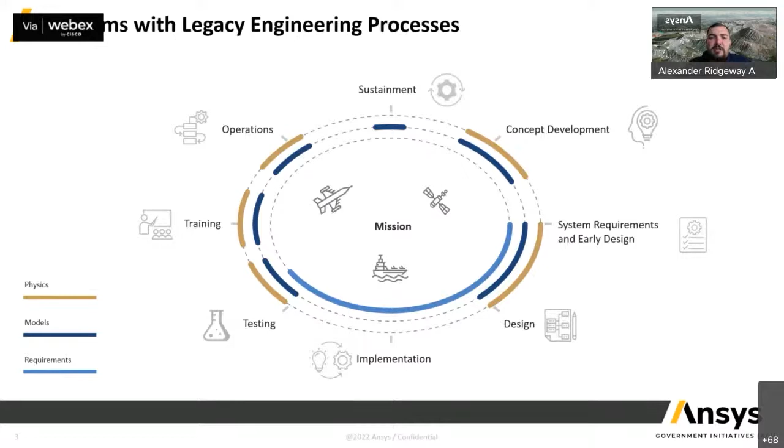There was so much time, so much effort lost in all of these gaps. And we know that in this process, we don't just go forward in time—we go back, from operations to a new concept, from testing back to design. Every time we're redesigning these tools, and it's not efficient.

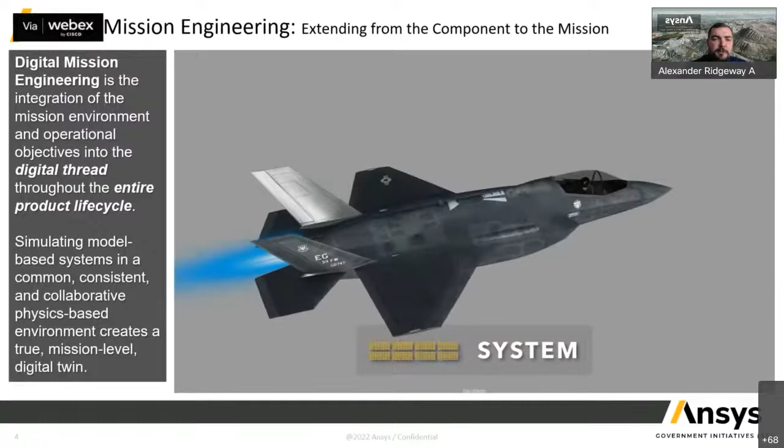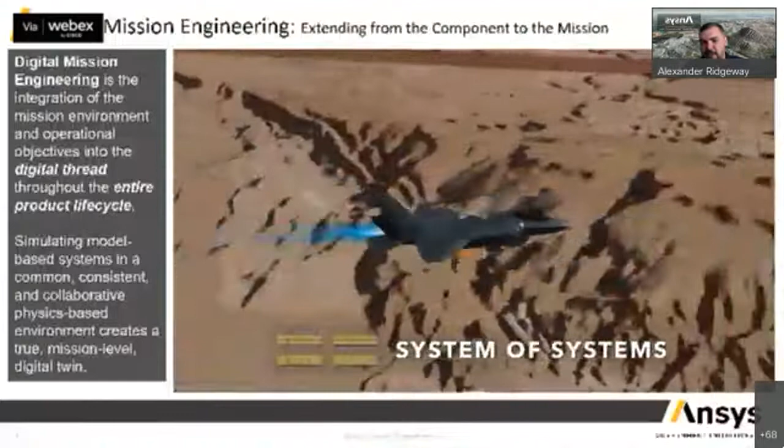So what we're talking about now is how to improve that efficiency using digital mission engineering. Digital mission engineering is the integration of the mission environment and the operational objectives into the digital thread throughout the entire product lifecycle. This video is showing the whole life cycle of an F-35, an aircraft in theater, in mission, performing. This mission is very defense oriented, and that's just the content and materials I have to explain digital mission engineering.

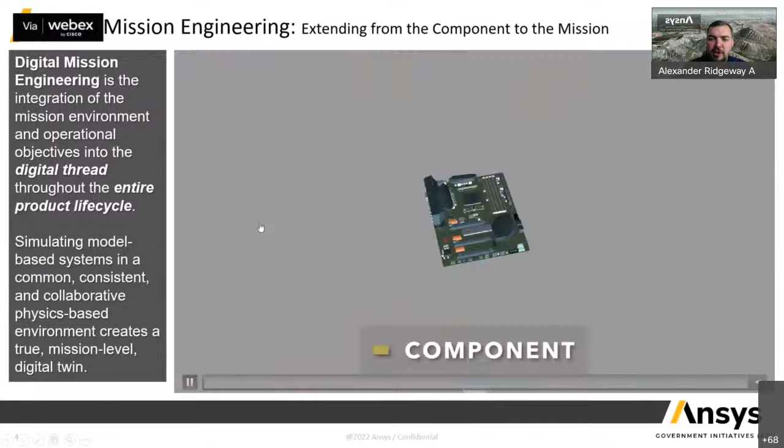But there are other missions you can use these tools for, especially cargo missions, passenger missions, UAV missions, urban air mobility missions. All of these missions are essentially similar, and they can all be modeled within our tools.

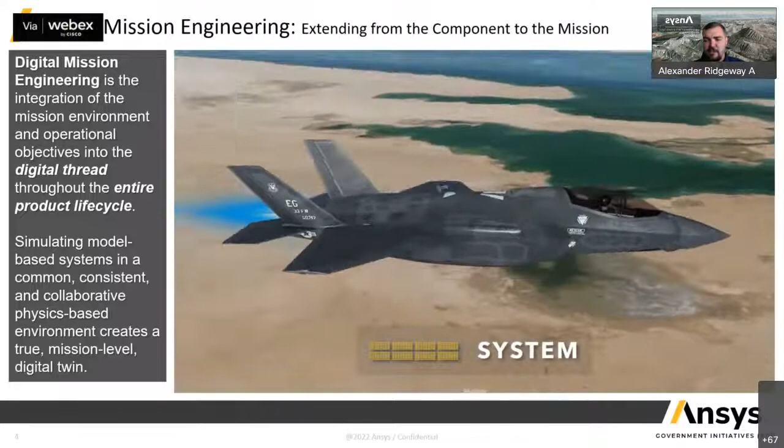So we take the component simulation, the subsystem simulations, the system simulations, and the system of systems simulations—maybe GPS, maybe a communication system on the ground, maybe a radar system at the airport—and we model all of those inside of the mission. It's very important. We do all of this so that we can create a digital twin, a digital representation of what's actually happening.

So here's that same example from before, the life cycle model, but now the life cycle model is throughout. We don't have the gaps in the design to implementation and the testing to the training. We maintain those models from the early conceptual development phase as we're building those systems, and we carry them throughout operations and sustainment.

The process, we cannot think of this as a linear approach. It continues to evolve and evolve. And there's also times where these life cycles spin off other life cycles, other development, other design, and we have to consider all of these things.

So overall, digital mission engineering requires that you put all of your components, your platforms, your systems of systems, all within a mission, all within a multi-domain physics environment to really improve your overall efficiency, optimize your performance, and just improve safety metrics due to things like traceability.

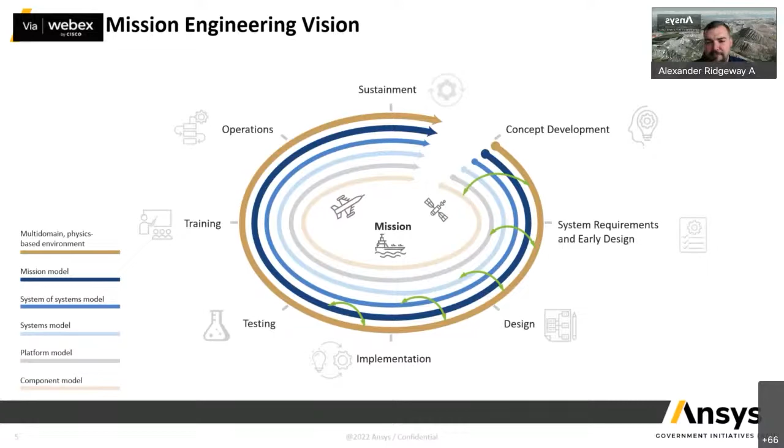And so now what I'm going to share with you is how to do it. These are kind of big ideas, but what are the direct steps in order for you to actually start the process of digitizing and performing digital mission engineering? Well, the first main step is structural analysis.

ANSYS provides tools like Mechanical, but there are other structural capabilities and structural analysis tools out there. Those are really important for the stress and strain, and really important for designing, building, and testing that system. That also has a very important part of the performance of the vehicle. The shape of the vehicle is directly related to the performance of the vehicle.

Are we going to do a lifting body aircraft in the future? How is that going to be developed, designed, and deployed? So mechanical, fluid, the structures and fluids, they all relate to each other, as well as external tools and external payloads like

electronics. Those could include radars, transmitters, and receivers, very important to understand not just can the vehicle fly, but in what condition. What condition, meaning communication conditions, pilot condition, weather condition, any different condition within the mission.

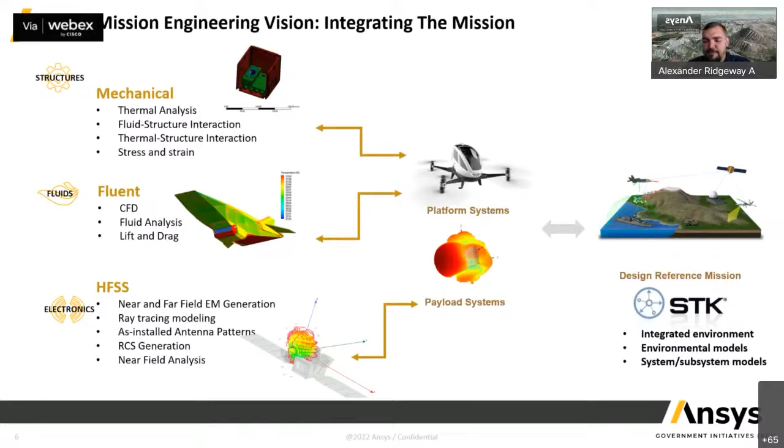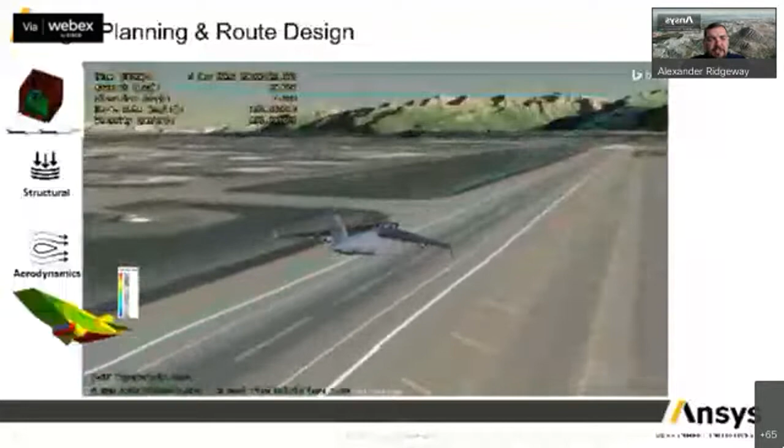And so now let's start looking at what it looks like inside of the mission and some of the capabilities that we can use. The first thing I'm going to show is a cargo aircraft taking off from the runway. There's a lot that got us here. We had to do the structural analysis, the design, the aerodynamics of this, and we had to analyze, predict, and understand the performance of this vehicle.

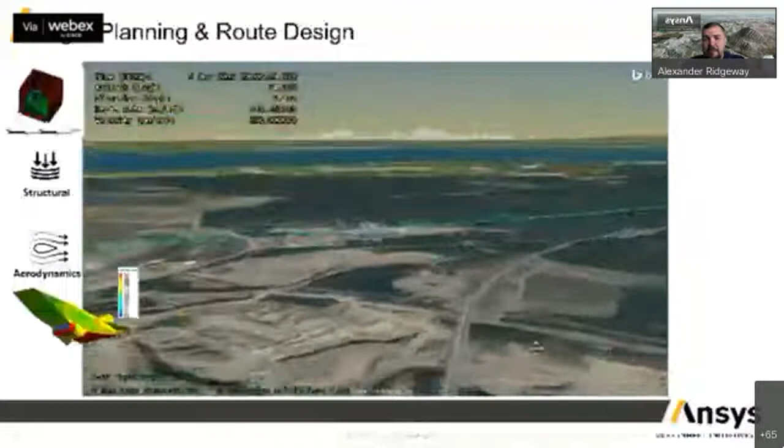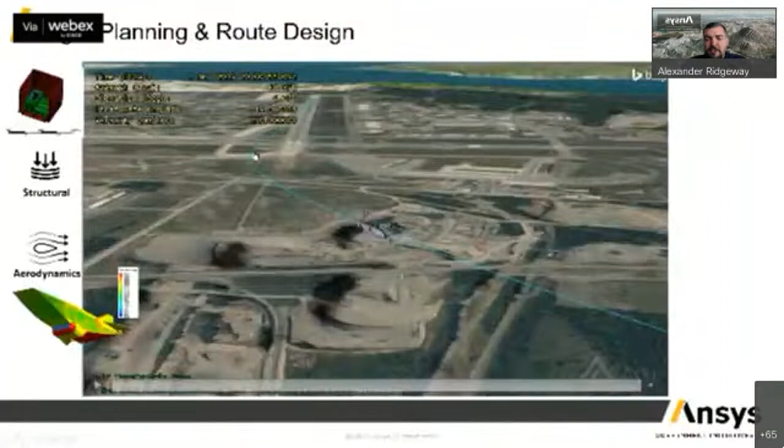So once we have all of that, we need to implement that all within the mission environment. Now we can say, if I had this cargo aircraft loaded with a tank, or two tanks, or passengers, will it be able to take off and successfully go? And what is the fuel efficiency? Should we fly it in a different direction? Should we fly it to a different area? And should we change in order to make it successful?

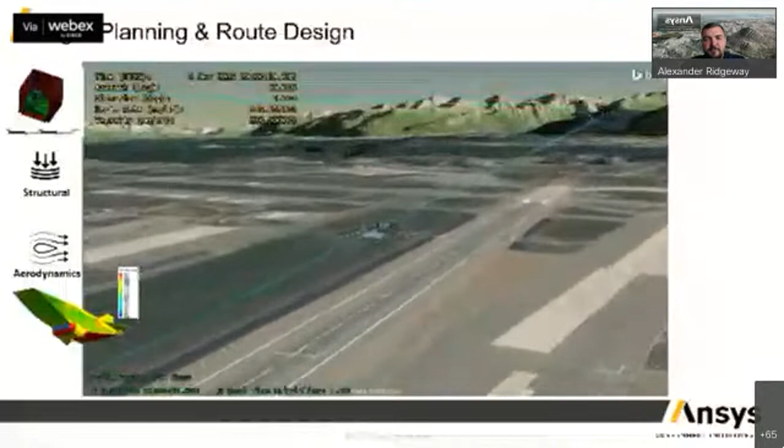So in the mission environment, in STK, you can design full route plans. You can do full route planning using the performance designed by computational fluid dynamics tools like Fluent.

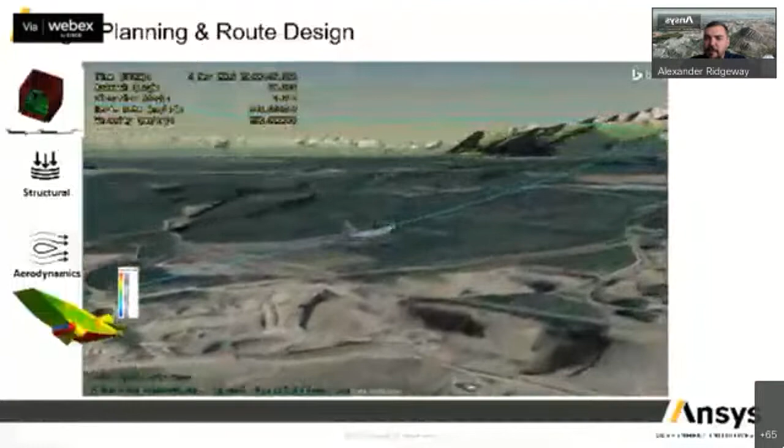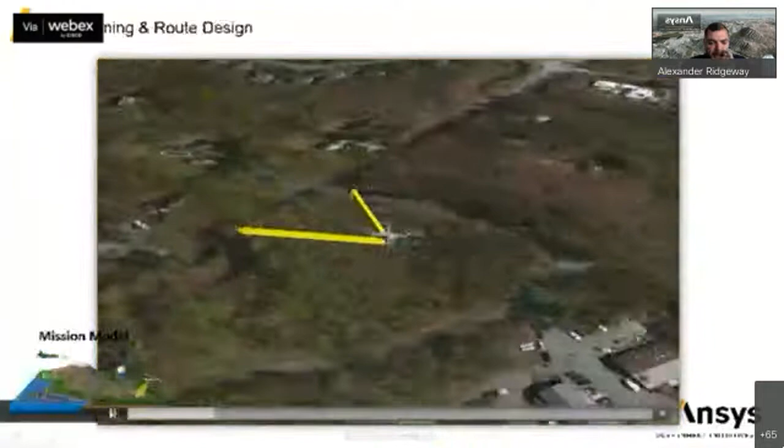Additionally, with our route design, we can utilize drones, smaller aircraft, as well as multi-domain and GIS information like these points here. So there's some areas showing radar coverage, I believe, and no-fly zones, and peaks where mountain regions are. It's a very short video, I wish I had a longer version, but I wanted to show how this is currently how things are done. You can see the large peaks and things that aircraft have to avoid.

But when we start looking at more drones and start utilizing the entire airspace, utilizing more and more of it, we have to get a little bit more granular, more accurate, and really simulate these things to a higher degree of fidelity. That might include full 3D modeling with buildings, and that's something our mission tools, STK, can do.

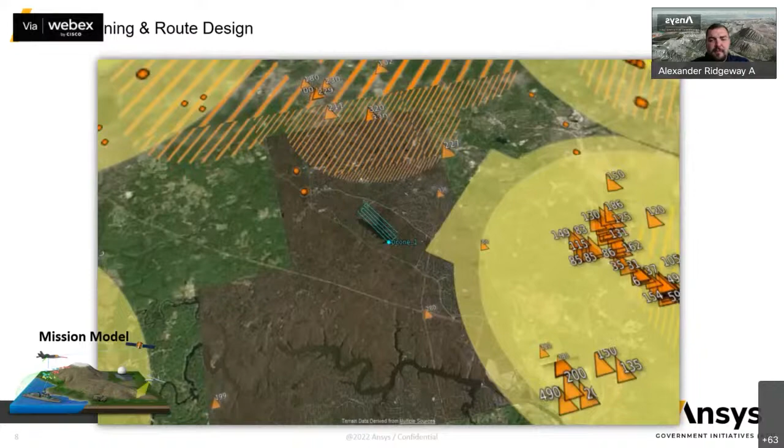Additionally, we want to look at things like radar visibility. Radar visibility is another example of mission. Not only do you want to be able to fly from one place to another, but you want to be able to be detected or not detected.

Sadly, I worked on the Malaysian Airlines flight that disappeared in the Indian Ocean down south. One of our customers and users of STK was actually modeling the radars all along the coast of Malaysia and Indonesia in order to understand who could have potentially seen that aircraft. And since none detected that aircraft, what were the potential routes it could have taken, and who could have potentially detected it. Unfortunately, we weren't able to find the location due to the incomplete amount of data. After a certain amount of time, we did not have any more information, and just one ping occurred.

So going forward, it's important to model where these aircraft are. Your mission is not just the performance of the vehicle, but getting passengers from place A to B safely and securely. And, God forbid anything happens, being able to understand and recreate what happened. Not having radar visibility in certain areas, or not having a third, potentially like a ship's AIS solution, is kind of dangerous. So these are some of the analyses you can run - radar analysis, very important.

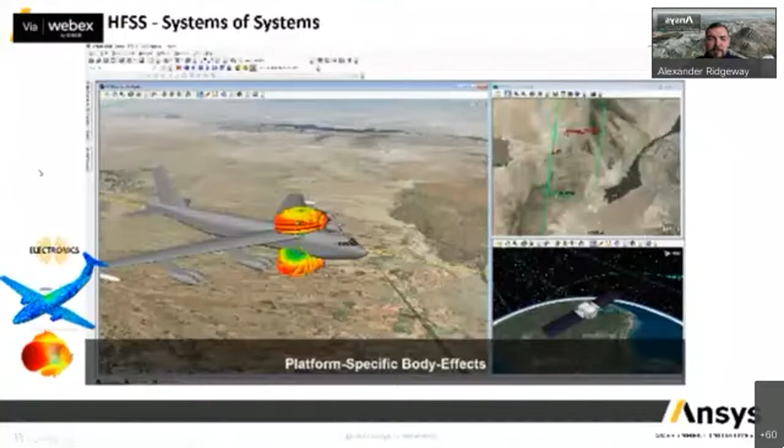Additionally, as part of the digital mission engineering, we want to look at our communications. Communications is a big part of aviation, of course. One of the things I want to show you is the difference between a realistic and a simplified simulation. In this case, we have an aircraft with a communication antenna gain pattern. The antenna gain in red is a very high gain - that's its main beam width. This is a very omnidirectional antenna, pointing out in all ways.

This is a simplification of what the real antenna is like. In this case we have a line, and that line indicates a communication link. So yes, we have a valid communication link in this simplified analysis. But if we were to pull the full digital mission engineering, the full digital twin of the communication payload, we would actually notice we've lost communication. That yellow line is hard to see, but it goes directly into this null region. So we were actually losing communication at the same time we expected it. Our mission was not successful, or partially successful or partially failed, due to the disruption of communication we've seen here.

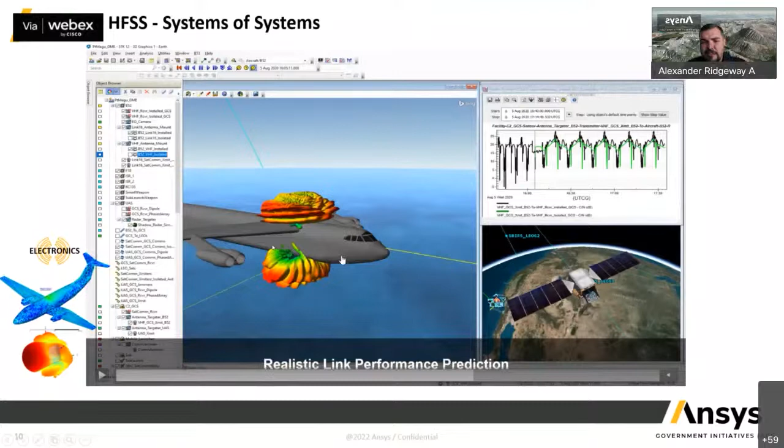Additionally, we can use aircraft, and we can design and build disrupting technologies. This simulation is something I did recently, just a few days ago, and I wanted to include it here. This is a high altitude vehicle, and there are certain groups in the US, as well as Japan and probably other countries, that are looking at high altitude aircraft to do communications. Instead of flying a satellite, they're going to fly a solar powered or long duration aircraft in circles above certain countries.

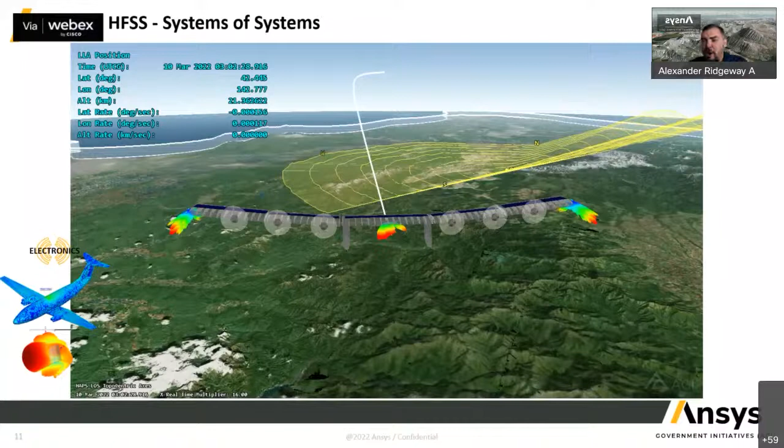And then the one thing I did notice is, running all this analysis, I actually had a very large gap. I had a very bad signal directly under the aircraft. That was just due to the antenna patterns themselves.

So is my mission successful? I modeled everything. I modeled the performance, I modeled the communications. I was able to see, can I communicate with the remote regions in the mountains here? Yes, but partially my mission failed because I wasn't able to communicate with this certain region here.

So I would have to say redesign. Maybe I redesigned my route, change the configuration of my communication antennas, maybe rotate them, change different things in order to make my mission successful.

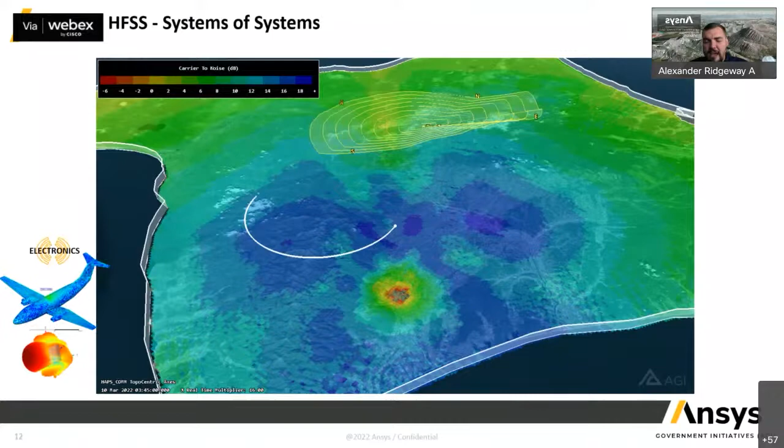And I might not have found out about that until I actually flew the test mission. The test mission, testing is very expensive. To actually fly an aircraft in test mode is very expensive. A lot of engineers, a lot of operators. But now I can run thousands and thousands of tests, millions of tests even, and I can understand how things are working without actually having to fly the system, the aircraft.

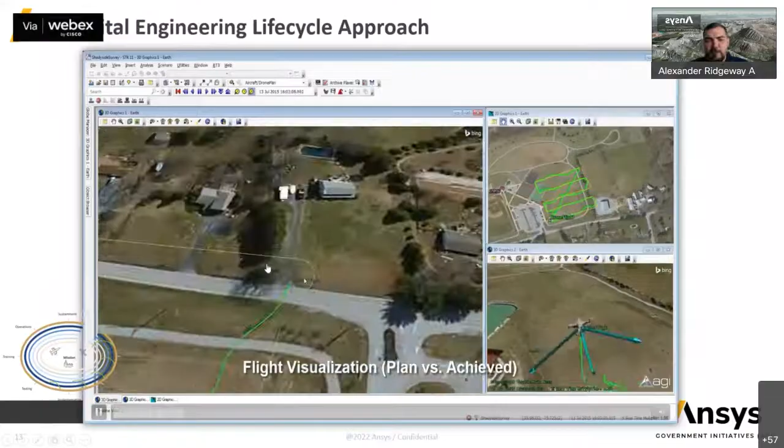Another example of flight testing, this was actually done by one of my friends and colleagues that I work with. He tried to do drone trials. So he bought a cheap drone and did a mission plan, and said, I want to follow this mission plan as close as possible. But what happened is he couldn't. His drone was too underpowered and he's not a good pilot, so he was off quite a bit.

And so why I show this, a drone that you can buy at a store with a credit card, is because you can simulate this with more advanced aircraft. It's very important to know exactly how far away or how much an aircraft is deviating from its expected route, and then understand why it's actually deviating. Is it on purpose? Is something happening? Is the wind model not correct? Is there actually a larger wind expected in that region? Or was it just something the pilot saw and wanted to avoid?

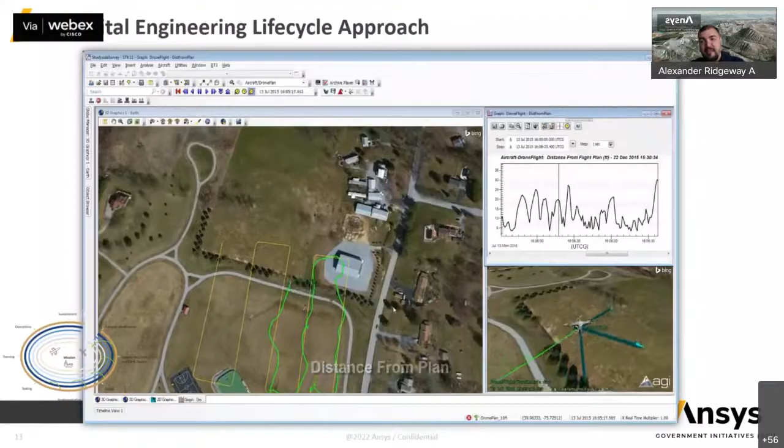So there are many different reasons why you want to run pre-mission planning as well as post-mission planning. And this could also be used for testing. So if you have test flights, you can model the test flights, figure out where they're supposed to be, and then the test flight shows you actually they're not performing as well as I expected, or the fuel usage is higher than I expected using this route.

So the differences, we had a question: what's the difference between the simulation and the real world? Well, there's always going to be some differences, but the real key thing is understanding why there's differences. Why is there a difference between this and this? Is it because the communication antenna gain pattern is not correct? We actually maybe put the antenna on the wrong side of the aircraft, not the right fuel, not the right performance model. Something has changed. Those differences between the simulation and the real world are the things you want to identify and understand.

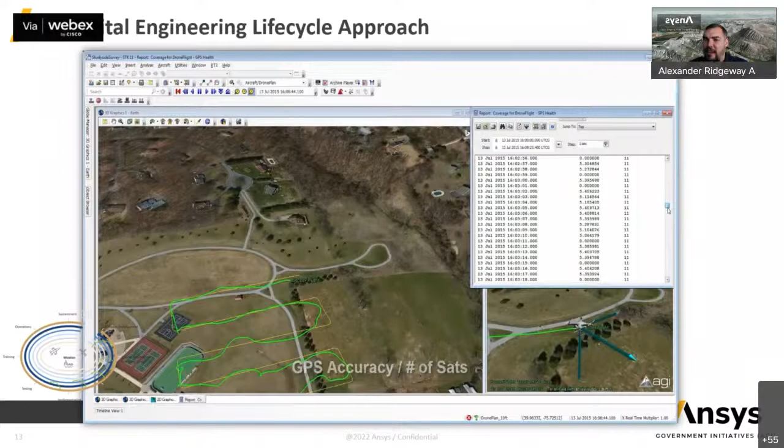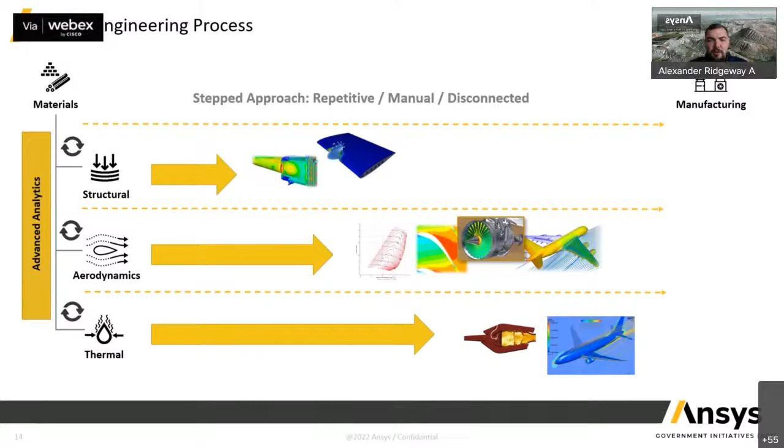So let me go back, back to one of the original slides, to talk about the legacy engineering process and how we would want to improve it. So how would we want to improve it? Well, we want to add more simulation. We want to add additional mission capabilities in order to optimize performance and optimize the mission. Not just can the vehicle fly, but can it optimize the mission?

So what we want to understand is external things like our ground station, our radar systems, as well as our communications. We need to understand those in order to have a successful mission. And I'll show you one main reason why we need to consider communications, or RF, for safety analysis.

So another thing that we see in digital mission engineering is breaking down these barriers and integrating machine to machine, analysis to analysis, in order to not have engineers share files directly with a flash drive, but actually connect those tools together. So structurals, aerodynamics, thermals, electronics simulations are all running together, machine to machine, and we're building up these models to be used later.

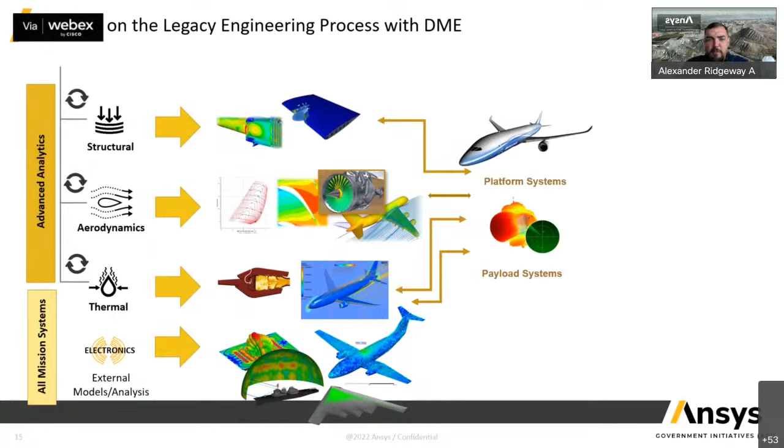We build up these models into these platform models, these system models. Attached are the payload models, attached are their capabilities. And then we build them into the reference mission.

This reference mission could be multiple reference missions. You could have a digital reference mission for every single route from every airport to every airport, and you could say which ones are successful, which ones need support, which have the expected fuel usage, which have too much fuel usage. How can we optimize those routes in order to get the best, optimal performance? So the digital reference mission doesn't have to be just a single takeoff and landing. You could have thousands and thousands of digital reference missions, and that's the real value of these tools.

And then overall, you can have them throughout the entire life cycle. These in the design phase, but you can also employ them in the testing and training phases, and also sustainment.

There were different groups. Part of my experience was I was in operations, and we actually had to change what our operations were due to some design failure. So instead of scrapping the mission, completing the mission, say the mission's done, we went back and spent about a year trying to redesign the mission. We rebuilt all the tools that we had originally in order to redesign and redeploy and fix a mission that was done. If we were employing the concepts of digital mission engineering, a failure on board of this mission would not have been so devastating.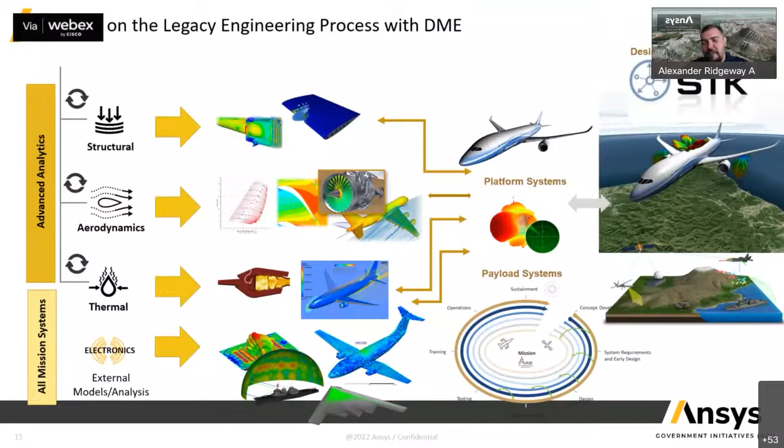And so I wanted to show you two examples of how we're actually using it. It's not just concepts and designs and ideas. We are using these tools in real life, in everyday use.

So the slides will be available. If you want to screenshot and grab this URL, the ANSYS blog has an amazing article about 5G and aircraft safety. This is one reason why I said it's important to not only have the performance of the vehicle, but also the performance of all the sensors and onboard payloads.

So does the mission work? This aircraft here is flying into an airport that has a 5G antenna. 5G providers Verizon and AT&T in the United States purchased future C-band services at certain frequencies that are approaching the aircraft safety and radar system frequencies. There is a small guard band between them, but we still need to simulate the effectiveness and the interference that these systems have.

So what my colleagues at ANSYS and AGI have done is actually model the transmitters from the 5G antenna and the receiver and the radar altimeter on the commercial aircraft. They flew this aircraft around where the 5G antenna was, and asked what is the overall performance of that altimeter. I don't want to spoil everything, so please check it out, it's a very short article.

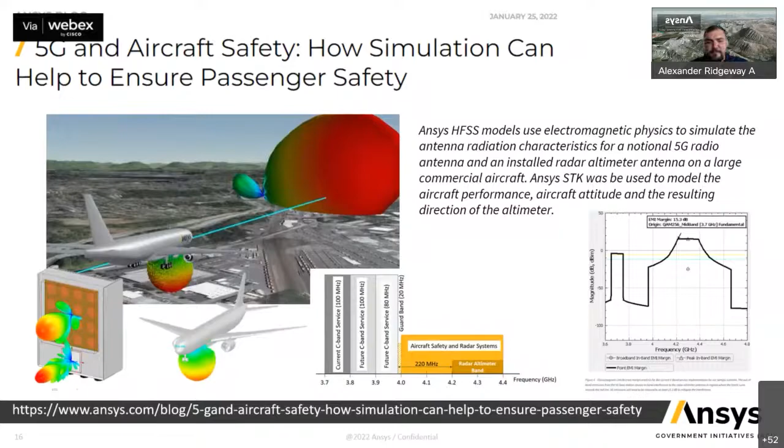And the last example before I wrap up is the GLADS program. GLADS is a U.S. Air Force program. It's actually software inside of the U.S. Air Force and the Air Mobility Command. The U.S. Air Force came to AGI and said, hey, we're having trouble with collaboration between all mission partners across different warfighting domains for mission execution and flight following.

This group was responsible for all cargo missions flying around the globe, and so they had tens to hundreds of aircraft at any given time carrying millions to billions of dollars worth of equipment in the air at any one moment. That was very scary for them, and they wanted to have an operational picture to reduce that risk. So the operational picture was done with AGI technology.

AGI technology like STK was integrated using web services, using web-based things, as well as legacy and enterprise system data. It also used GOTS, government off-the-shelf technology, and implemented that into it. So STK as the mission tool was able to pull in different data feeds and run analysis from other tools and implement that analysis into its overall computation.

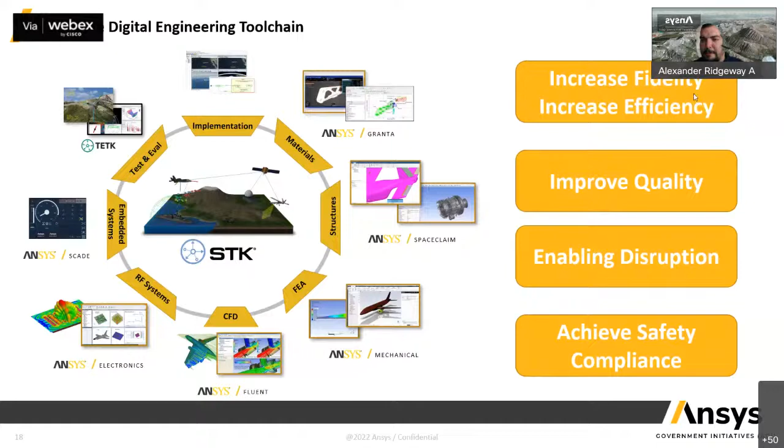Thank you, Mr. Alex, for your wonderful insights on design and simulation. So we have one question: How much importance is given to testing versus simulation results during certification of an aircraft or aero engine by regulatory bodies? That was the question, Mr. Alex.

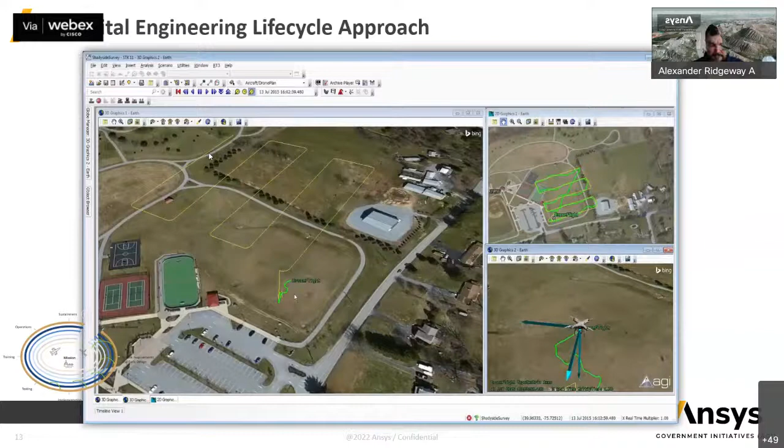In order to actually validate their simulation, what's very important is that you're validating and understanding: is your aircraft going to fly? Is it going to perform in theater, in mission? What's really cool about STK and our mission tools is that we developed a tool specifically for flight testing. It's called the T&E Toolkit, part of STK Enterprise.

And it allows you to pull in all of your data sets, all of your telemetry from a bunch of different data sources, and overlay that inside of the mission so that you can understand if my aircraft was banking in a certain way, how much strain and stress was on that sensor. If I lose communications to the ground, why is that? Well, I was doing a barrel roll or some sort of very stringent test, or I was flying low. There are many different ways to understand if my aircraft will be successful in mission, and T&E Toolkit allows you to do that.

Before AGI got involved, a lot of the testing in T&E groups, part of the F-35 program, were actually just using Excel. They were scrolling Excel, and if the data went bad, they would look at why, and they would look at the video, and they would just spend hours and hours trying to understand. When we started putting all of that Excel data directly into the mission environment, we were easily able to point out, oh yeah, that's the problem, that quick. Those types of aha moments are very important when you have a very complex system and very complex analysis. So I hope that answers the question.